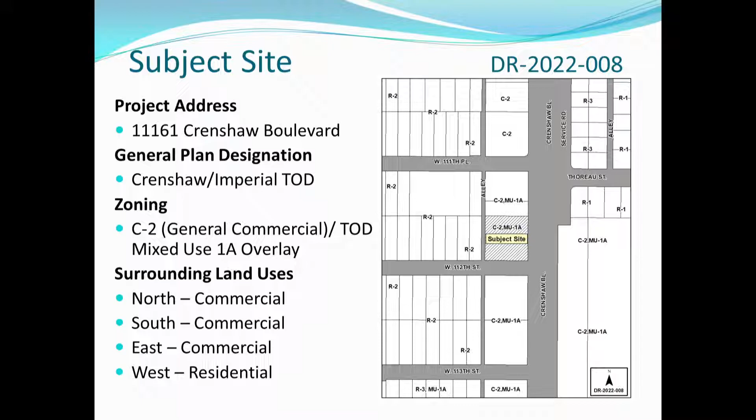This is the first design review in the new Crenshaw Imperial TOD area. The property is located on the northwest corner of Crenshaw Boulevard and 112th Street, with commercial uses to the north, south, and east, and residential uses to the west.

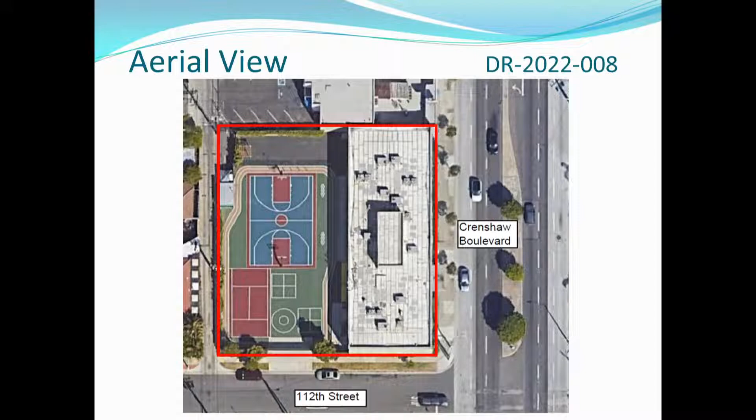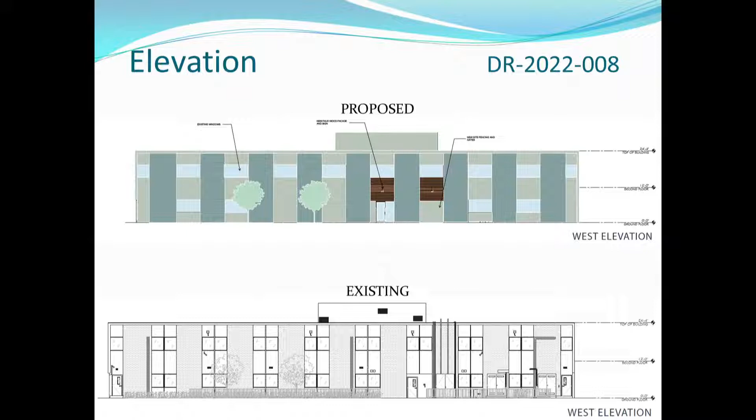The applicant is proposing exterior facade alterations to an existing commercial structure with no changes to the building footprint. Alterations to the east facade include removal of the main entrance door, removal of 89 feet of the raised planter, and new classroom doors. Alterations to the west facade include installation of horizontal faux wood siding above the new main entrance doors, new classroom windows, and signage on the new faux wood facade.

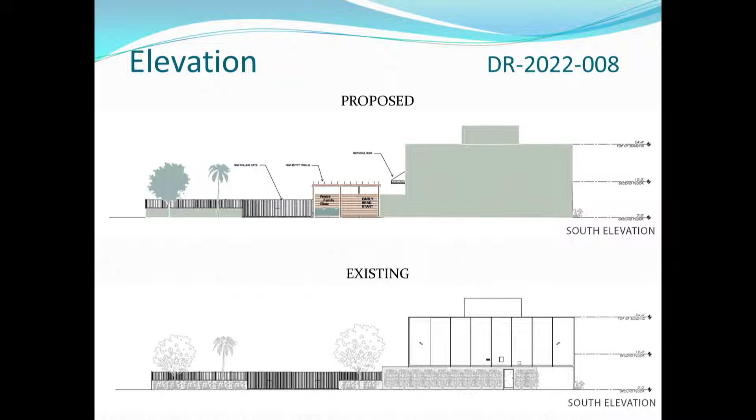Alterations to the south facade include installation of new entry trellis and new rolling gate. Findings have been made that the project is in accordance with design review standards, and as conditioned, the proposed project will serve as an enhancement to its neighborhood setting and will be compatible with the surrounding area.

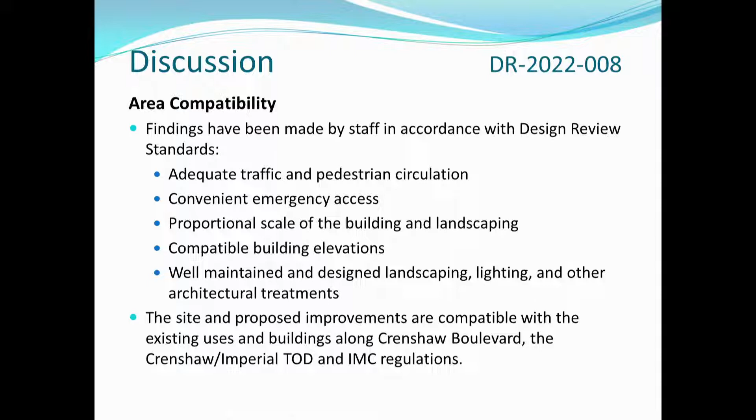The facade and the architectural treatments are compatible with the Crenshaw Imperial TOD mixed-use guideline in that parking is located at the rear of the building, parking will be screened, and the project will use high-quality materials and finishes for updates. If the Planning Commission approves the request, the applicant will be required to complete the site plan review process.

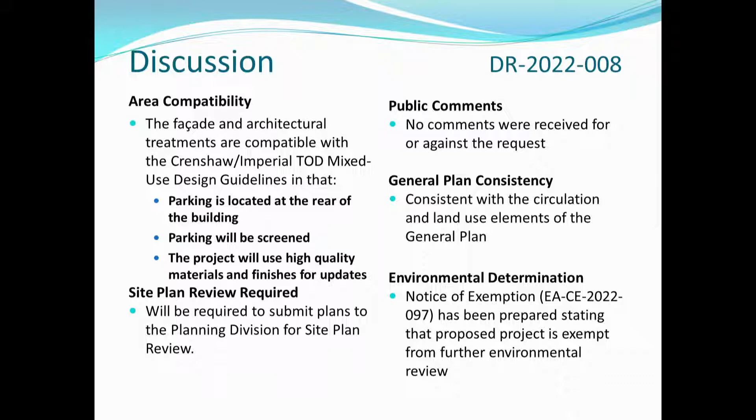The proposed project is consistent with the general plan and supports the goals of the circulation and land use elements, and is exempt from further environmental review. This concludes my presentation, and I am available to answer any questions the commission might have. The applicant is also on the phone tonight to answer any questions. Thank you.

We're going to open up for questions for you. We're going to start with Commissioner Shaw Williams. No questions at this time. Commissioner Trejo? No questions, thank you.

Commissioner Rice: Yes, we have existing windows in the building, but it sounds like I heard you say we're going to have new windows. Are all of the windows going to be replaced to be consistent across the entire exterior? Yes, it looks like they will be all changed to be consistent.

Okay, thank you. Commissioner Patrick? No questions at this time, thank you. No questions for me either. Thank you very much, good presentation. If the applicant is available, could you give us your name and tell us about your project? Your line is unmuted. Please go ahead.

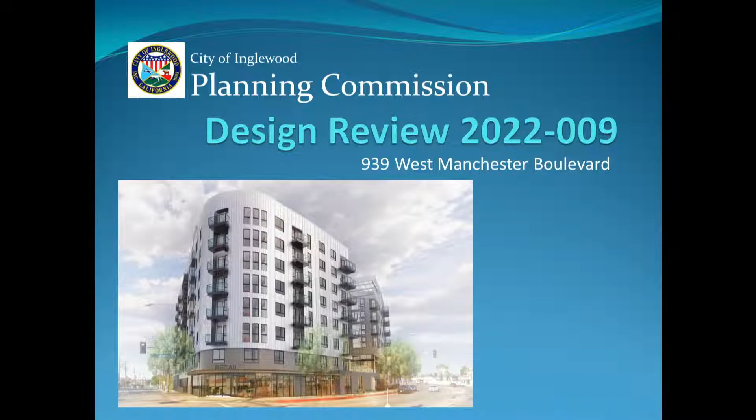Good evening, Chairman Springs and members of the Commission. The subject site for this design review is located at 939 West Manchester Boulevard on the northeast corner of Manchester Boulevard and Hindry Avenue. The zoning for the property is mixed-use arts cluster, and it is located within the Westchester Veterans Transit-Oriented District land use designation.

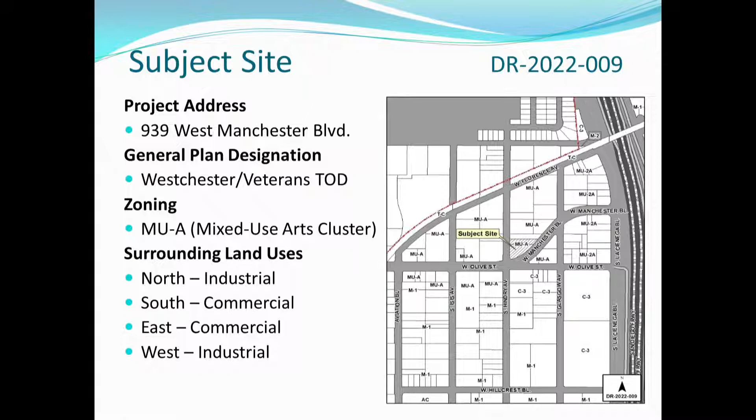The approximately 38,000 square foot property has frontage on Manchester Boulevard to the south and east and Hindry Avenue to the west. Properties to the north, east, and west are developed with commercial and industrial uses. Property to the south across Manchester Boulevard is developed with commercial uses.

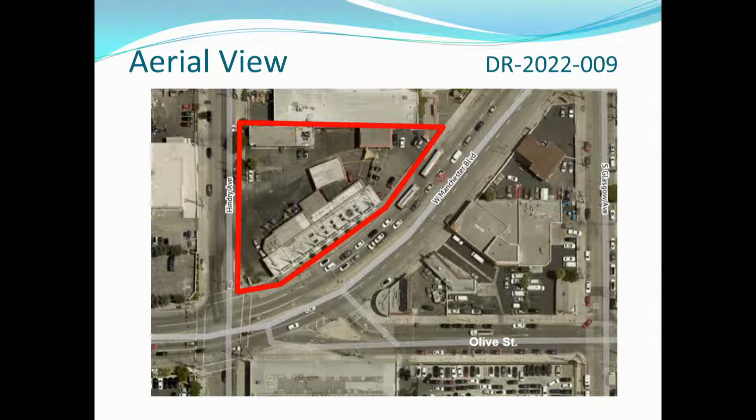Since the subject site is located within the MUA zone of the Westchester Veterans TOD, design review is required for all new development, and this is the first design review for the Westchester Veterans TOD plan. The subject site is currently developed with 3 one-story buildings that operate as a car wash and auto repair service with associated on-site parking.

The applicant is proposing the construction of an 8-story mixed-use building with 3 basement levels, with 3,500 square feet of retail floor area for 2 tenant spaces, 222 residential units including 11 affordable units, and associated on-site parking to meet IMC requirements.

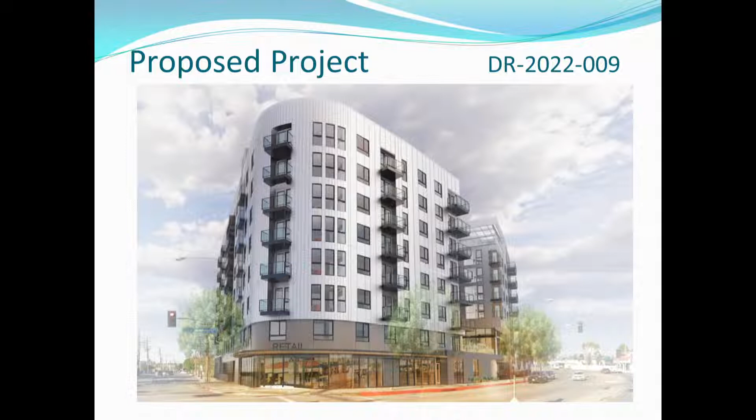The ground level will contain the retail area, residential leasing and lobby areas, and parking. Levels 2 through 8 will include residential units, residential amenities, and a roof deck located on the 8th floor. The development will also include 3 levels of subterranean parking. The residential component is proposed to contain studio units, one-bedroom units, and two-bedroom units.

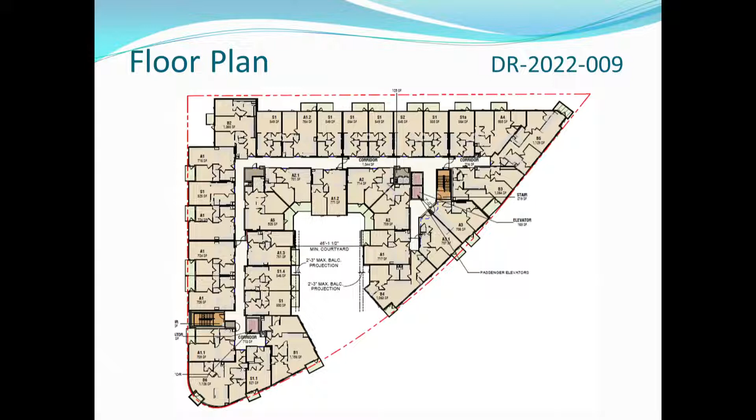The project exceeds open space requirements by providing common area open space and private balconies for 184 of the units, and a total of approximately 19,000 square feet of open space will be provided.

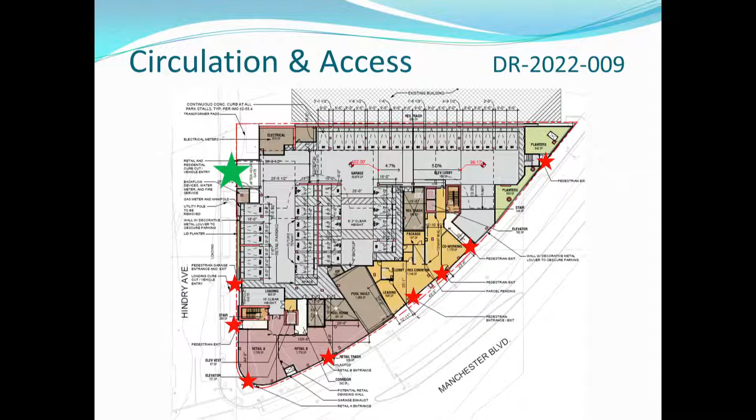The proposed development will have multiple pedestrian access points, shown by the red stars on the screen, including multiple residential entries, commercial pedestrian entryways at the corner and on Manchester Boulevard, one parking garage entryway on Hindry, and another parking garage entryway on Manchester. Vehicular access into the parking garage will only be provided from Hindry Avenue, shown with the large green star on the screen.

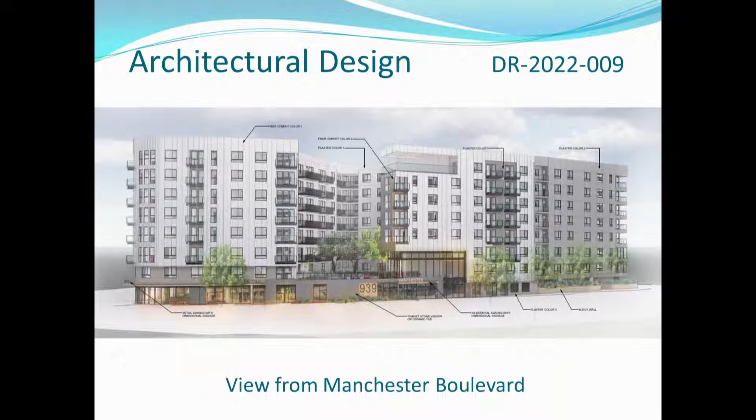The architectural style of the development is contemporary and utilizes neutral toned colors of white, gray, and brown. Material selections include plaster, vertical board panels, stone veneer, block wall, and transparent glass.

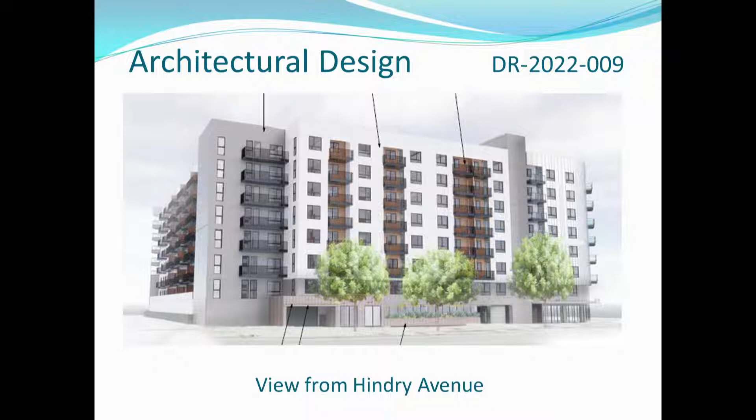A number of architectural elements used throughout the development incorporate the TOD mixed-use design guideline requirements, including shop front frontage type with canopy awnings over the entryways, a separate and prominent residential entrance, prominent retail space located at the site's corner, varying building heights due to the pool deck and roof deck, balconies provided for individual units, multiple pedestrian access points to the on-site parking, screened and below-grade parking, enclosed commercial loading and trash area, and varying exterior color and materials used while maintaining a harmonious color palette.

Due to these incorporated elements, the architectural design of the project is compatible with the area and is in compliance with all of the requirements of the TOD mixed-use design guidelines.

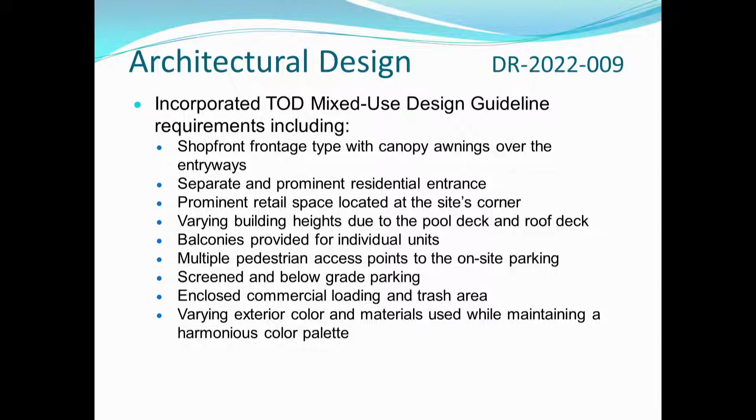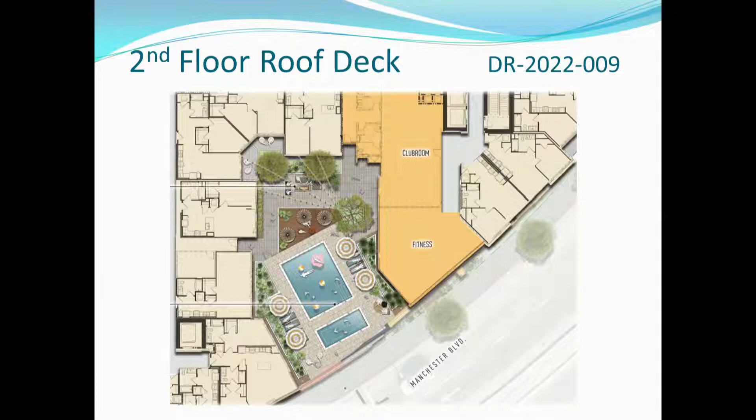The proposed development includes landscaped elements throughout the site. The main residential entryway on Manchester Boulevard will include enhanced paving, planters, and large potted plants. The second floor pool deck will include decorative pavers, festival lights, and built-in planters for vegetation and trees. The 8th level roof deck will also include decorative pavers and planting elements. These landscaped amenities will include the pool and spa, lounge areas, outdoor furniture, built-in barbecues, and fire pits.

Staff has determined that the findings required for design review have been met and that the site and proposed design are compatible with the existing uses and buildings along Manchester Boulevard, the Westchester Veterans TOD land use designation, and IMC regulations.

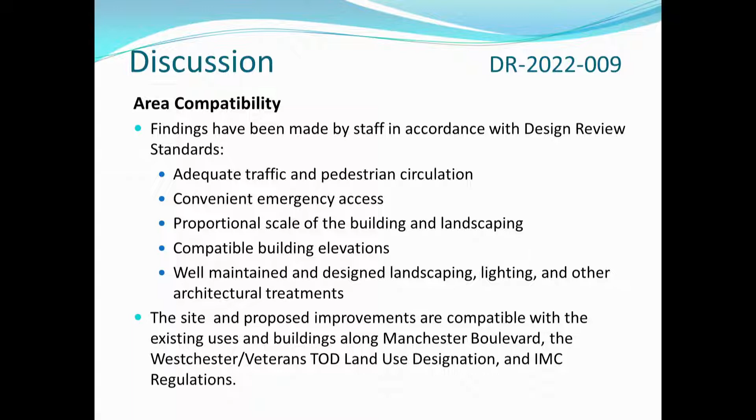If the Planning Commission approves the request, the applicant will be required to complete the site plan review process and record a parcel map to consolidate the lots into one. The proposed development will provide interior and exterior cameras throughout the site, with the exact number and location of cameras being determined during site plan review.

One public comment in favor of the project has been received. This comment was placed at your seats earlier.

The proposed project is consistent with elements of the general plan and is exempt from further environmental review. This concludes my presentation, and I'm available for any questions.

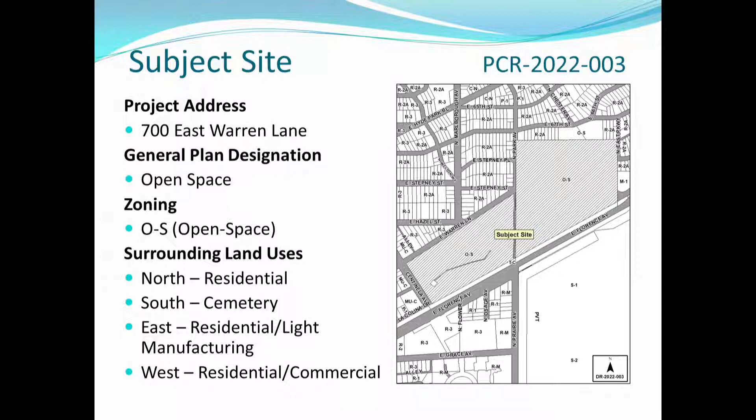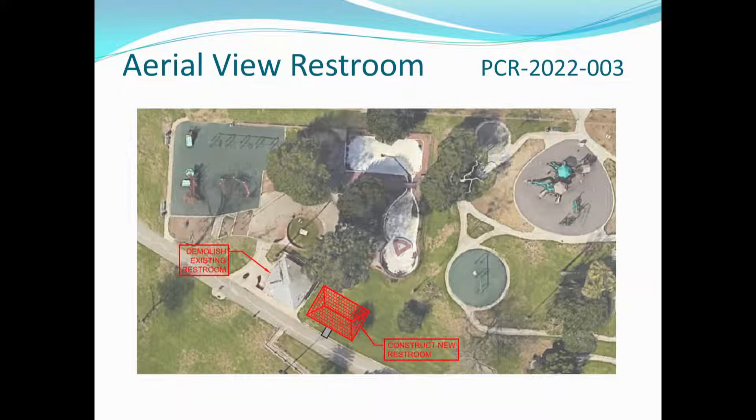There will be new restrooms due to ADA compliance and needed modifications based on age and condition. The new restroom location is highlighted with the red box. The existing restrooms, which will be demolished, are seen near the proposed restrooms. There will be new shade pavilions located in the same area as those being demolished, in a more functional configuration.

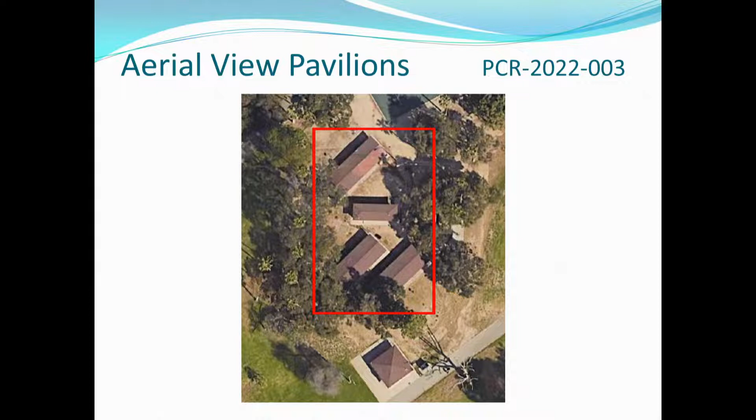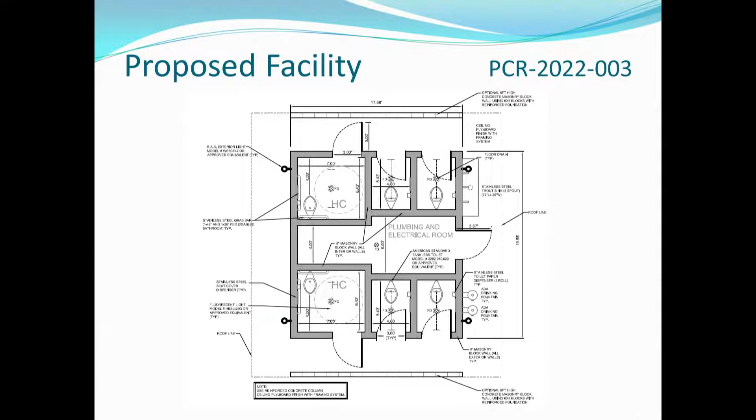The proposed restroom facility will include 6 unisex restroom stalls. ADA stalls will include changing tables, a plumbing and electrical room with a separate entrance, a stainless steel sink, and 2 drinking fountains on the west facade.

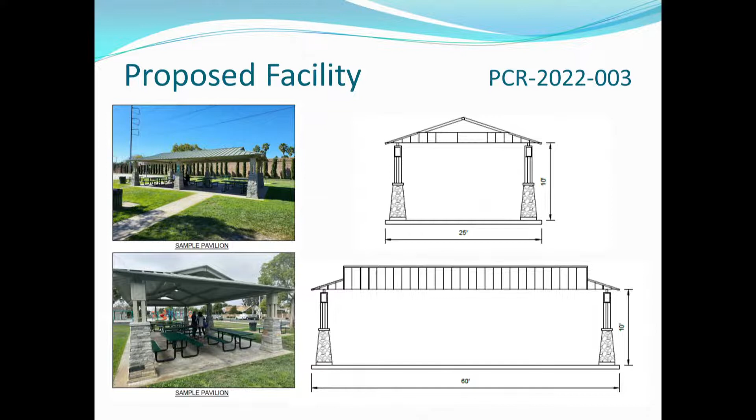The new shade pavilions will keep the same architectural shape and style as the current pavilions. The legs will differ in that they include stone on the legs.

If the Planning Commission approves the request, the applicant will be required to complete the site plan review process. A notice of exemption has been prepared stating the project is exempt from further environmental review. This concludes my presentation, and I'm available to answer any questions. The applicant is also on the phone tonight to answer any questions.

All right, thank you, we're going to open up for questions. Commissioner Patrick? I haven't any questions. My only comment is the sooner, the better, and I'm looking forward to it.

Commissioner Rice: Did I miss something on one of your slides? It looked as though under one of the shade pavilions it had a sink, with running water. Yes, so one of them will include a sink in the shade pavilion. All right, thank you.

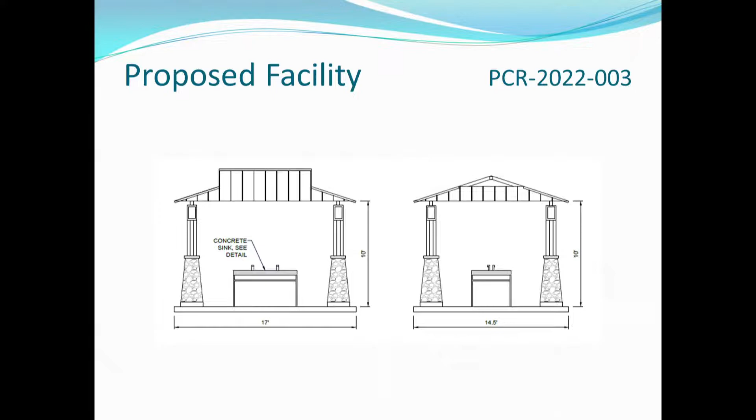Commissioner Trejo: No questions, thank you. Commissioner Shaw Williams: No questions, thank you. I have no questions, great job. They got you working, huh?

Yes. Okay, is the applicant, can you give us your name? I think I know who it is. Give us your name and tell us about this project.

Greetings, Commissioners, this is Sabrina Barnes, Director for Parks, Recreation, and Community Services. I knew it. As stated at a previous meeting, I am extremely excited by the support of our Mayor and Council to invest in our flagship park. We are upgrading all of the restrooms at our park, so this will make the 3rd restroom on the Vinson Park site.

It is currently our model with the vault-style rooms and the wash sink on the outside. We will continue to improve our restrooms, but likewise, we are taking a total look at Edward Vinson Park, and our next effort will be to renovate the shade structures.

And Commissioner Williams, if you don't mind me calling you out, I know you will appreciate it, as you recently this summer had your, I believe, school reunion or class reunion there. Yes. So hopefully next year when you're back, you'll have a new location to enjoy.

Yes, we are better configuring it so that it works better for the users. Commissioner Rice, you were right, there is a sink there, a wash basin for individuals that may need to wash out that barbecue pan, or they drop the food or something. That is available to the participants using that space. And then also there are some additional tables and chairs under a shade tree that participants will be able to enjoy.